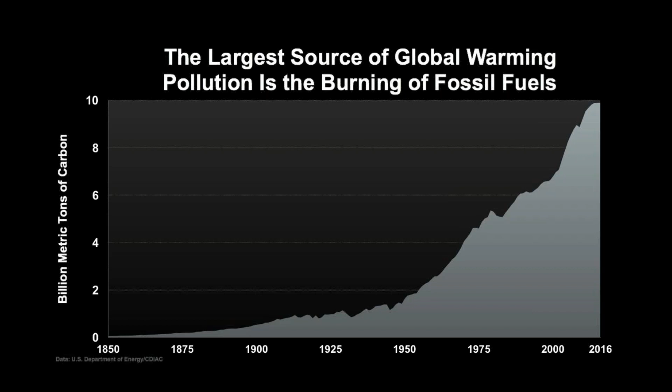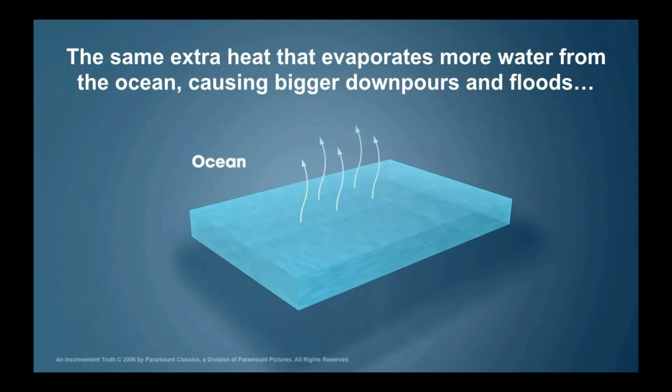The impacts are starting to be so visible. We're not talking theoretical anymore. We're talking flooding and natural disasters at a level like we have not seen. The explanations are pretty simple. The warming of the air evaporates more moisture from the ocean and contributes to stronger storms. And it also draws more moisture from soil and so contributes to drought.

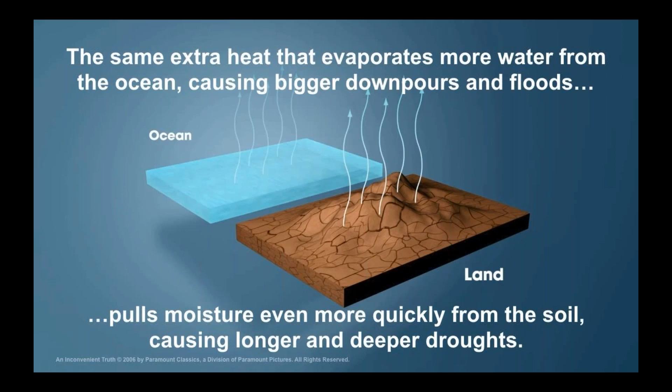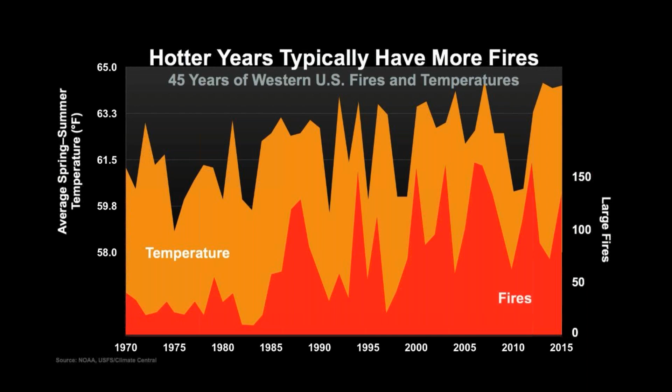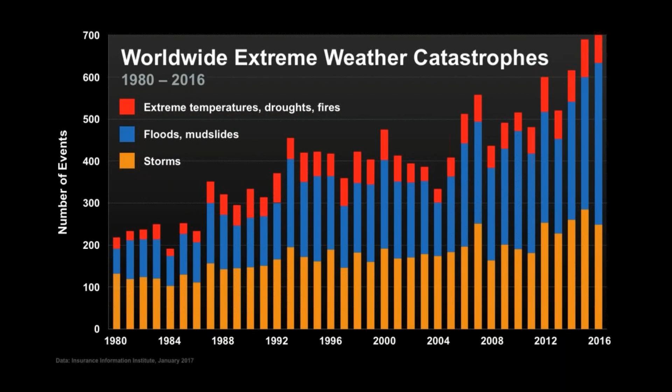We're starting to link these catastrophes to migration patterns, and then migration patterns that impact on our politics. You could almost make statements that what happened last November, I'm not going to get into politics, but a pretty dramatic election last November, and you can make the connection between that and immigration. They're not that far-fetched. And the potential for more of it. Imagine if New York City flooded. What would be the impact on upstate New York? Where are those people going to go? I'll tell you, they're probably not going to go south.

Tropical diseases on the move. This is migrations of tropical diseases, including to North America. I've got to ask about the migration of the Lyme tick in the last 10 years in upstate New York. We didn't have it, what, 15 years ago? And now it's a major issue. It certainly is an epidemic. And the risk of losing up to 50% of all land-based species.

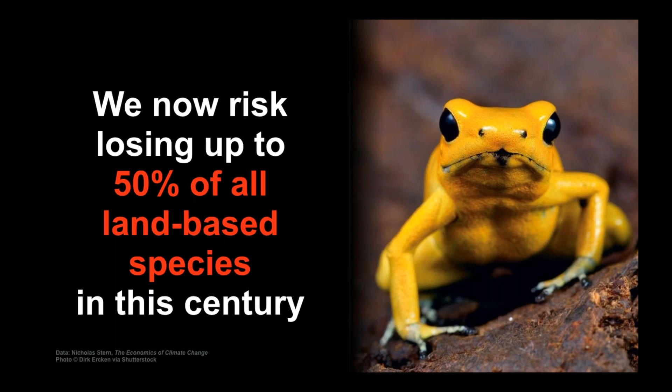So this is about one. I showed 10 slides. His slide show is 500 slides, and he moves through it in about an hour and a half. He's got a short version, and I excerpted the short version. Many of you have heard this stuff, but for me, it was an eye-opener to see it again. And this precious planet of ours really is at risk.

So my takeaways. My daughter Noah said, "Come with me." I said, "I'll go along." Well, I came away saying to myself, climate change, unlike 11 years ago, when I saw it through a lens of melting glaciers, today I see it differently. I see it much more broadly. An urgent crisis requiring immediate and broad action, including and especially by us. I think there is an important calling and a role for us in the building science, and opportunity.

And it's changing, and it's changing fast. I'm going to make a presentation today on what I think some of the building research needs are, research and design, whether it's academic, architects, engineering, or behavioral science. There is a calling for a broad spectrum of research, and it's different. It's changing fast. That's what I'm going to try and touch on today.

I'm going to challenge you a little. I'm going to make some fairly strong statements that I believe about what those changing needs are. It's intended to stimulate discussion, but I believe it. So, broadly, priorities: scale. We need to scale up, and we need to scale up fast.

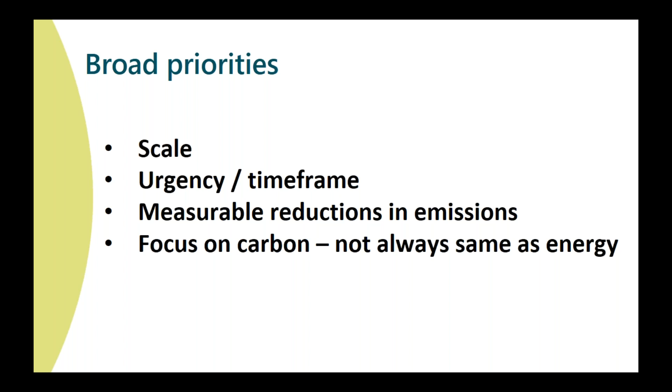With a focus on carbon. We think of carbon as kind of synonymous with energy, but it's not. There's some subtle difference. I'm seeing an emerging consensus that the electric grid will become more renewable. In upstate New York, we're lucky. We've got a lot of hydro from Niagara Falls and from the Saint Lawrence Seaway. We've got a growing amount of solar. We've got a little bit of wind starting to happen, and Cuomo's talking about a lot more wind offshore.

We're already at about 25%, and the governor's goal is 50% by 2030. That's 13 years away. And he's putting some oomph behind that goal. If you've read about what's happening in Europe, Portugal, Denmark, Scotland, the Netherlands, many of these countries have dramatically increased the number of wind turbines. You fly over those countries, you can see them, thousands of wind turbines. And so this is positive.

Ian, can we chime in? Is that okay? Sure. Yeah.

So on your last slide, you said that it should be carbon, not energy. Then you have that the grid will become renewable. I'm kind of of the mind that things that are renewable do not always provide the most carbon benefits. Any thoughts on that? You're looking at life cycle then? No, so if you have $1,000 to spend to save the world, where should you spend it first? I think that's a great question. It means optimization of the trade-offs between supply and demand. I would pose that as exactly the research that I think is needed.

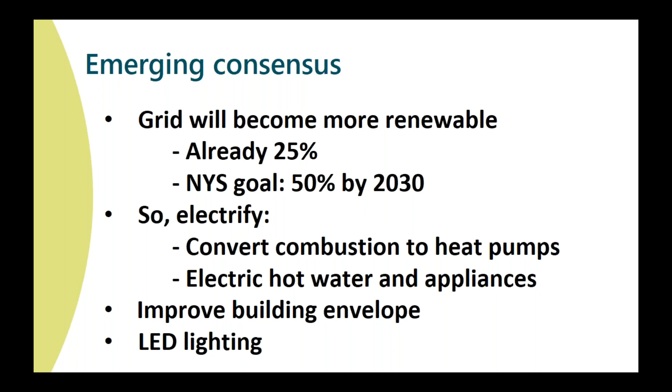Heat pumps are majorly here and here to stay. This is in Tompkins County, the growth in heat pumps, an informal survey we did of contractors. Mostly in new buildings. You've got a challenge in existing buildings, and that challenge is the low cost of natural gas. But in new buildings, we did a study for the county, and we're almost at a tipping point, where demand for heat pumps has grown so fast that their price has come down, and we're about to cross over the price of gas furnaces and boilers in homes. When that happens, there will be no reason to do combustion. And we're very close in Tompkins County.

So can you just say a word about Tompkins County? Is it reflective of the rest of the state? What's special about Tompkins County? First of all, we have the lowest unemployment in the state. We've got Cornell University, $3 billion in our economy. It's a relatively wealthy and progressive county, but we often look to it for trends.

So very often, NYSERDA takes little things that we've tried in Tompkins County and releases it to the state. So I would say that this is a community that understands climate change and is making decisions. And we have a very active, it's not only the environmental action, it's our county planning department that has just gotten NYSEG to stop a natural gas pipeline. And the PSC has ordered NYSEG to go ahead. NYSEG asked to do it. We're not going to put in a new gas pipeline, and we're going to do heat pumps for all of Northeast Tompkins County. So we're a few years, maybe 5 years ahead, but I'm seeing heat pumps going in Syracuse, Rotterdam. It's happening around the state.

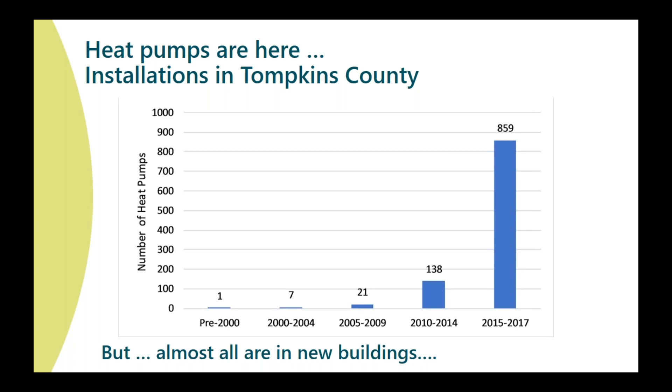We've got a challenge for retrofits. That's where we have a huge challenge, and it's the low price of natural gas that's killing us. So, over in Holland, I visited last summer, and I looked at the Energiesprong, which means Energy Leap program. And they are retrofitting over 100,000 apartments. I talked about scale. And this is what they're doing. They're recladding them, and they're filling the roof with solar, and then they're putting air to water heat pumps to replace boilers. But they're spending $90,000 per apartment. It just raises the question. I mean, we're getting into the same range as just taking the buildings down and putting up new buildings.

In New York State, when I run the numbers on replacing gas boilers and furnaces with heat pumps, I'm coming up with a payback over 50 years. You save a little bit of money, but not a lot. And so retrofits are a major challenge. So, the 50-year payback, that's without an envelope retrofit? Without an envelope, yeah. So it doesn't come down that much with an envelope. Even the envelope retrofits are struggling.

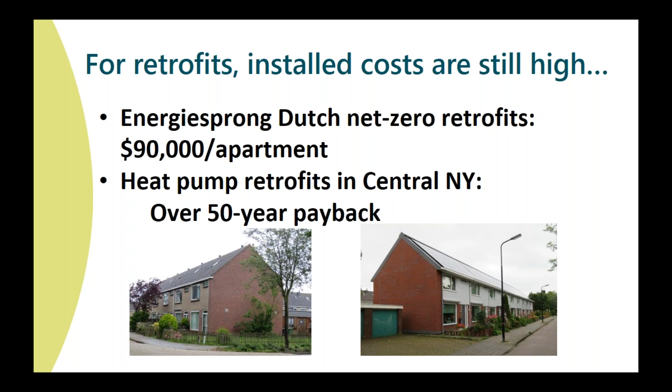And I want to present it just in terms of the research need. Given the consensus on electrification and high installation costs, finding ways to reduce install costs is a major priority. And this is a research need. We need to find ways to reduce install costs. We need to optimize the costs, heating versus envelope. What's the right balance of high efficiency heating versus envelope? We need to optimize renewables, or low carbon, whatever you want to call it. We need to optimize these things. And this is where there's a real role for academics who understand multiple variables and how to optimize it.

We need to reduce installation labor, and I think back to the time and motion studies we did 30 or 40 years ago in industry. We need to find ways, and it's very, very feasible. And on the basis of good research, we can develop best practice. We did some of this with deep energy retrofits, where we even looked at the type of tape that's used to tape exterior rigid insulation and how much faster it is to use a tape on an applicator rather than to peel off something. There's a lot to be gained just by looking at the industrial aspect of this work.

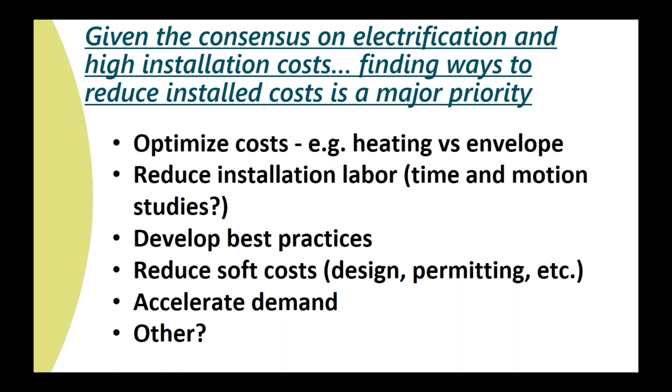So acceleration, work in the area of acceleration. COE and Taitem and some others work with an acceleration initiative that NYPA had done. Acceleration is a good concept and it's interesting. We need to do more of it.

Okay, now I'm going to switch to envelope. What is the right amount of glazing? We often see some tension between engineers and architects over glazing. Architects in general like glazing. It provides natural light, provides views, and it provides daylighting. And it's attractive from the exterior. There are many good reasons why we like glazing.

There are also energy penalties with glazing. Those of us who are engineers that have done energy modeling, it jumps out at us. It screams at us. And so it's the people at ASHRAE who have been pushing the limit on glazing as WWR, window to wall ratio. So our new energy code, October 2016, has a limit, 30%. You can't do more than 30% window to wall ratio on commercial buildings.

No limit yet for residential. And there are some exceptions. You can tiptoe around that rule if you use some exceptions. I did a survey of high performance buildings in the Ithaca area, net zero buildings, LEED platinum buildings, buildings that were really fabulous buildings. And every single one had a window to wall ratio of less than 20%.

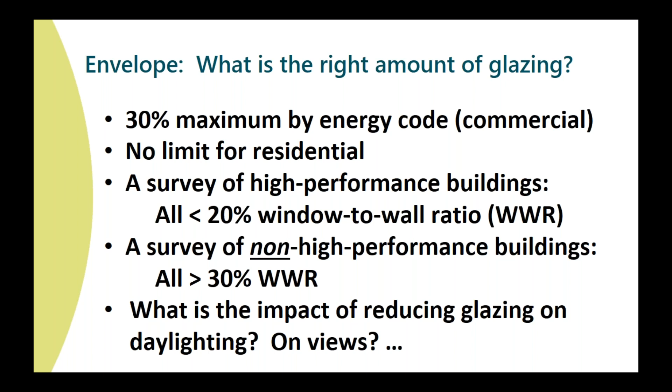I did a survey of non-high performance buildings in the Ithaca area, ones that just complied with the energy code. They're not LEED, they're nothing special. All of them have a window to wall ratio over 30%. Most of them were started and designed before the new energy code. So this issue of how much glazing is a major issue, and I want to deal with it step by step. I first want to talk about daylight.

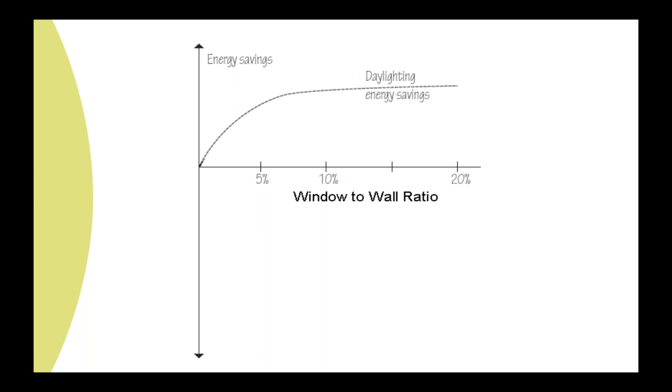So this is a graph that's excerpted from my first book. When we add glazing to a building, if a building doesn't have any windows, there's no savings from daylight, right? So as we start to add windows, we see good savings, good daylight. And as we add more and more windows, we reach a point at which there are no added savings. We've done as much daylighting as we can. So that's what happens with the energy savings with daylight.

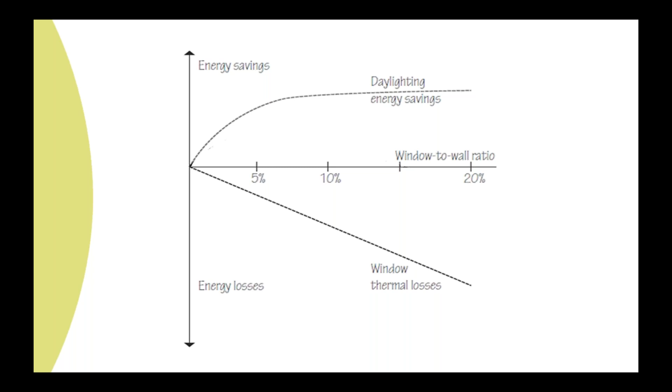Window thermal losses work against you, and they keep growing, and they grow, and they grow. The good thing is that with daylighting savings in office buildings, the savings are greater. The slope of this line is greater than the slope of this line, so you want to add those two, right? And if you add the two, you see there are net savings, but the net savings start to go away as you keep adding glazing. And there is an optimum.

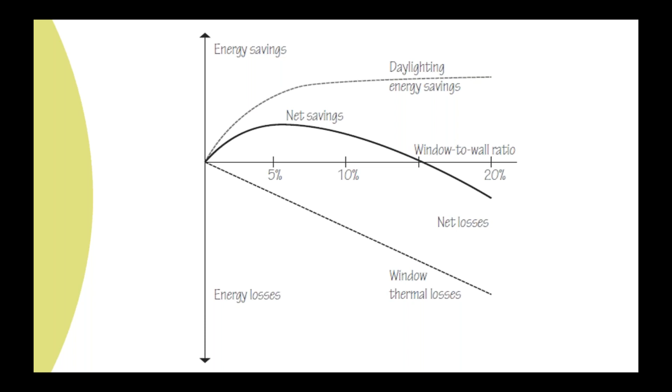I have done a lot of literature searches, and the best paper I can find on this is from 1981. Back then we were talking about incandescent lighting and a little bit of fluorescent light. And things have changed. How have they changed? Well, lighting has become more and more efficient. And as lighting becomes more efficient, this line starts to come down, and your savings start to come down. And I don't know what that optimum is. I have a guess it's below 10% window to wall.

It's small. For some buildings, like homes, residential buildings, where lighting on average is only on for 2 or 3 hours a day, this never goes positive. There is no benefit to daylight. Yes? There's no energy benefit. No energy benefit to daylight. So you're going to talk about views? I'm going to talk about views next. Okay. I'm trying to be methodical, but I'm also wanting to be honest.

The energy savings from daylighting is going down fast as LED lighting and the controls that come with LED lighting reduce the electricity usage of artificial lighting. We're moving towards no benefit to daylight. And if there is, it's small and it requires a very small amount of light. Much less than we currently do.

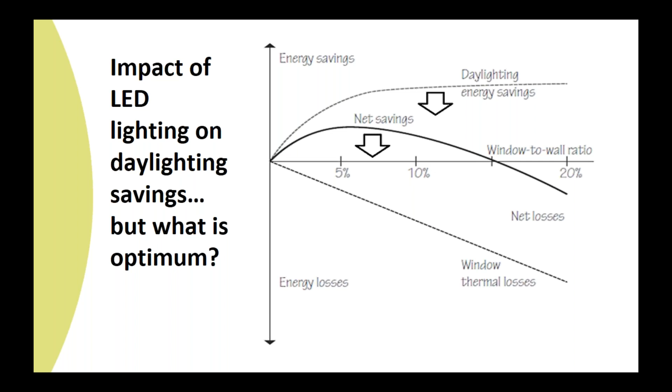Okay, now let's talk about view. If small glazing is required for daylight, what's needed for view? The WELL standard is some kind of a wellness health standard. It's not one I'm familiar with, but I did look at its requirement. It has a 20% minimum window to wall ratio in regularly occupied spaces required for acceptable view. Minimum of 20%.

BREEAM is the same. LEED, I don't think has a requirement. Well, it's not required. You can get a point for views, but there's no minimum window to wall. Do we really know? I have to say, I think that this 20%, I'm guessing somebody pulled it from a hat. So I would really like to encourage us to be asking questions.

In your beautiful Brooklyn brownstone row houses, I guarantee you window to wall ratio is like well below 10%. You've got a facade, and then all of those interior spaces are party wall. And I think we have too much light at 30%, and certainly if we use the little exceptions we can, and in residential buildings, 30, 40, 50%. It's way too much for daylighting, and I would argue it's way too much for view.

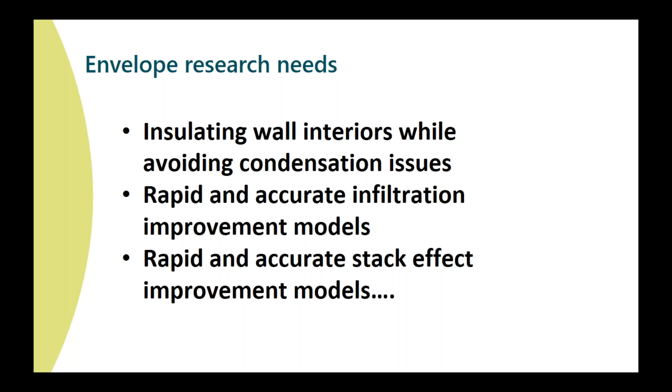And we need models. You know, a lot of people in academia are good with models. They're much better than us who are in the building design field. We need those people who are good at models. Rapid and accurate stack effect improvement models. We're only beginning to understand stack effect.

I did a project, this is my house, in Home Energy 2 or 3 months ago, where we looked at stack effect. And stack effect is much more than hot air rising. The big finding was that stack effect is as much cold air falling. If you stand in an open stairwell and put a wet hand near the ceiling, you will feel the warm air rising. And if you put your wet hand near the floor, you will feel the cold air falling. And I believe this starts to explain why upper stories of buildings are way overheated.

It's not just warm air rising, it's cold air falling. My takeaway from this project is we need to understand more. We just don't understand enough about this.

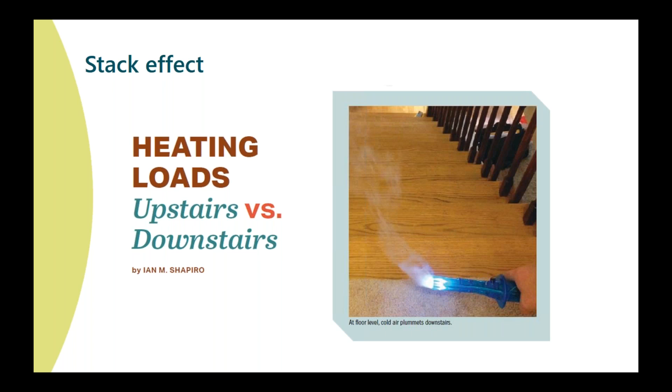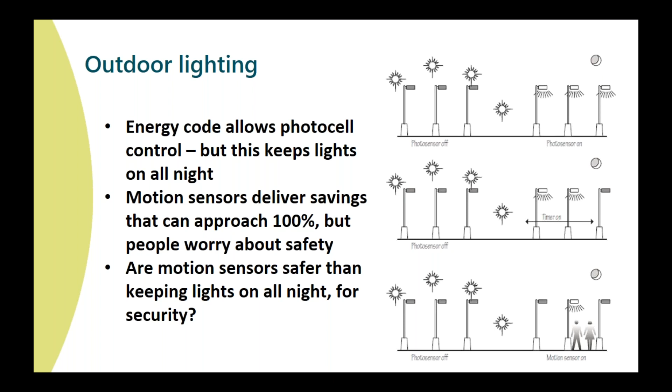If it is safe, I can tell you right now, we'll save 90 to 99% of our outside lighting. We will put it all on motion. But there's a need for interdisciplinary research, and we have to move beyond just speculating.

Plug loads. Growth. Plug loads are growing, and I see it in our energy projects. We measure the results of energy savings on many projects. We do this for NYSERDA. And we have seen us repeatedly meeting our goals for combustion gas savings, or for fossil fuel savings, and we often don't meet our goals on electric. And one of the speculations is that we're saving energy with our lighting improvement, and we're losing it because plug loads keep growing.

Plug loads are largely not addressed by the building energy codes. The new energy code has a little bit about so many percentages of the plugs needing to be controllable or something. But we need to know more. What works in the area of plug loads, a great area of research, and the behavior. How can we tell people to turn things off? And is there anything more we can put in the energy code? Because in our building designs, there's limited things that we currently do.

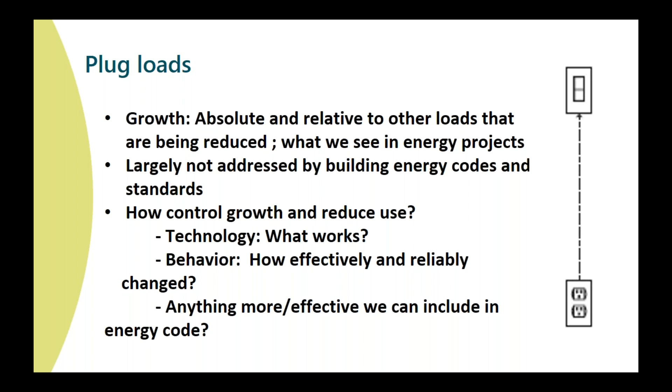Electrification: I think over time, space heating is going to go to heat pumps. We're left with industrial processes, ovens, drying, many of which are fossil fuel driven, and we need efficient electric substitutes for those. Heat pumps I've already mentioned for space heating, hot water I'll talk about in a minute, and then smaller loads. And as we electrify, as we remove fossil fuel loads and build up our electric loads, the grid is going to need to accommodate those changes.

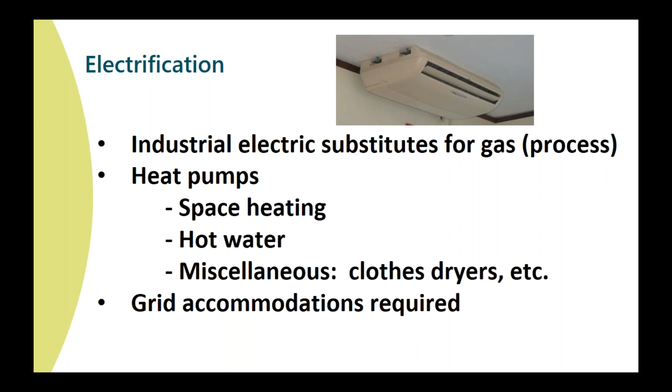Domestic hot water: I mentioned that the hot water loads are growing. I've been doing this work for 30 years, and if you ask me today what I should put in my net zero house, I honestly cannot tell you what the best water heater is. I just don't know. Hugh has done some fabulous research in this area. We've got heat pumps. I threw a heat pump in my basement. I'm very happy with it. But my basement has a boiler, so it's kind of using some of the heat from the boiler.

There's a move towards not using basements in high performance buildings, and then a packaged heat pump like this one doesn't make as much sense. You can't put it in a closet. So then maybe it should be a split system. Well, the best, lowest cost split system heat pump these days is like $3,000 or $5,000. We've got challenges here with heat pump water heaters. Maybe we just go back to electric resistance water heaters.

I have questions about central versus point of use, and I'll be honest, when people come to me, I tell them I prefer electric. We've got a basement heat pump. I'm still struggling with this, even after I've read it. Yeah, so a heat pump water heater makes sense in a bad basement, but if you have a good basement, it no longer makes sense. How can we reduce losses? How can we reduce flows, point of use?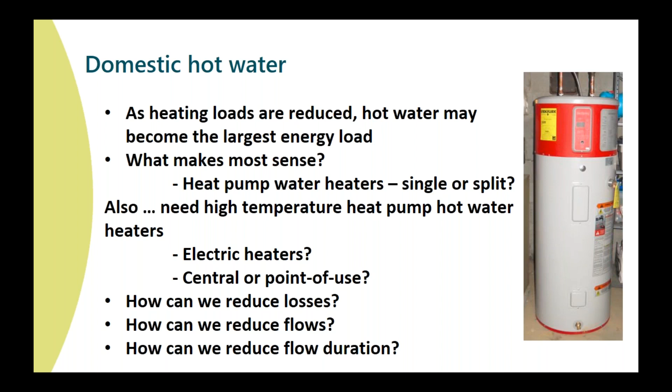Heat pump efficiency. I spent the last 6 months on this. I wrote a report for Tompkins County that said that in certain situations, ductless heat pumps use the same amount of energy as ground source. Well, New York Geo came after me with tar and feathers. I wrote a report based on my model that said that ductless heat pumps, in a situation where you don't have distribution losses and you've got better temperature control, are as good as ground source heat pumps that are ducted, have duct losses, and don't have as good temperature control. They usually have just one thermostat.

Well, they came after me and they said no, air source heat pumps stink. So I spent literally several months. We did a literature survey.

Hugh Henderson pops up. Hugh pops up over and over. So Hugh did a study. Like whack-a-mole. He keeps popping up. You know, he did a study of 2 or 3 high-performance buildings in this area, and found that indeed their air source efficiency is very low.

I came up with this list, I don't know, eight of them, all of which I felt are fairly good. It's hard to measure the efficiency of a heat pump. It's really hard, especially if it's variable speed. And so they're probably different climates, right? Because Ecotope is Washington, probably. This was Northwest, yeah. But most of them were Northeast. Bohac, I think, is Midwest, upper Midwest.

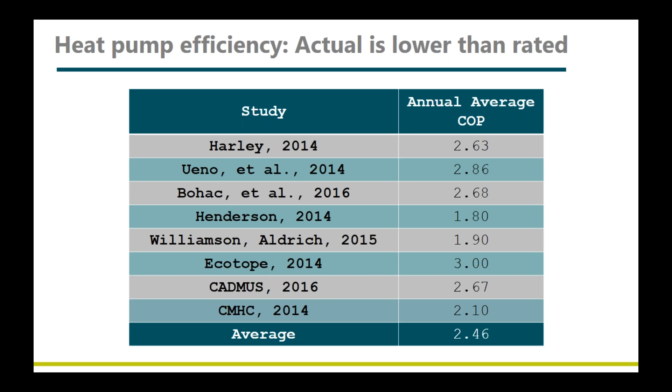So we're not there. And just for perspective, I just got done looking at 50 water or geothermal systems, and 3.6 was the average. So I changed my report. And I said that as of today, ground source heat pumps are still more efficient than air source heat pumps. And this is where I'm at today. So we need best practices to get to the rated efficiency. We need higher efficiency in general. We need more efficient product. We need to do some work on setback.

There is almost universal consensus in this country that you cannot lower the temperature of heat pumps because recovering from setback, they operate inefficiently, and the current view is that we cannot set back the heat. If we could, the savings would be huge because heat pumps are thermodynamic devices, and at a lower indoor temperature, they operate much more efficiently. So we really need to try and address this in research. What is the issue? Why are they struggling? If we can solve this problem, we're going to boost their efficiency by 20%.

We need to reduce the install cost. This is already coming down in new construction. We need to reduce the install costs for retrofits. And we need more data on the larger VRF heat pumps versus the smaller ones. I've got some preliminary data that I shared with Steven Winter Associates. They presented down in New York City a few weeks ago. Our preliminary findings, we're talking 2 or 3 buildings, say that smaller air source heat pumps use less energy than larger VRF systems. I don't know why. We don't have a lot of data on these larger VRF systems.

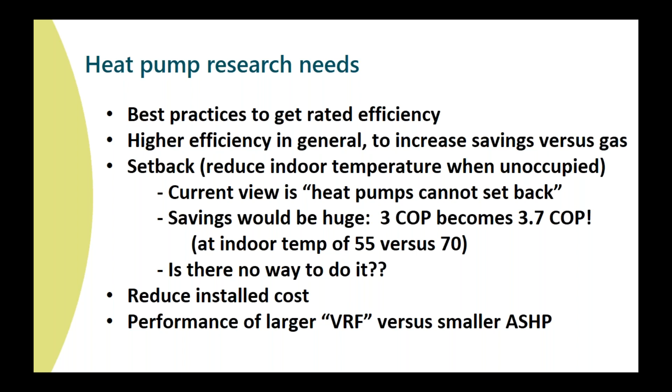Now we're talking about the grid. I often get asked, if we start converting all this combustion stuff to heat pumps, are we not going to blow up the grid? Currently, we are a summer peaking state. New York State, this is the New York ISO. We peak at about 4 p.m. on a summer day. And look at this, the winter. Where are we going to put the heat pump load? Well, it's going to show up in the middle of the night, in fact, early morning in the winter, because that's when our heating loads are great. So if we throw in a bunch of heat pumps, they're going to add load right here. It's just filling in the trough.

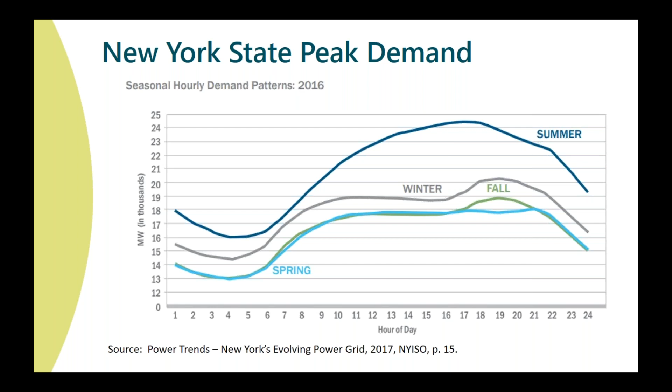In the short term, there's no problem converting fossil fuels to heat pumps. Now, if we go ahead and convert our whole building stock, I was in New York City last week. They are talking about trying to convert New York City from fossil fuels to heat pumps. I mean, that's how bold their vision is. And if we convert all of our buildings from fossil fuels to heat pumps, we're going to become winter peaking. So there's not a short-term problem. In fact, short-term it's good. We're going to fill in this trough, and our efficient heat pump cooling is going to reduce this one. It's great. Long-term, we've got to shift from summer to winter, and then we need more wind and hydro, which will do that nighttime winter stuff, because the solar is great for the summer daytime.

Policy. I want us to not limit ourselves to technology. We have to step out of our comfort zone, even the engineers among us, and we need to get involved in policy discussion. I'm writing a green building policy for the city of Ithaca right now. We're going to present about it at the Green Building Conference. Something that might tiptoe us as a requirement toward net zero.

So how do we continue improving the energy code? What is the limit? How far can we go? Are we talking net zero? How do we handle renewables? All of these are questions I'm struggling with for the city of Ithaca. The state of California is talking about requiring residential buildings net zero by 2020. That's 3 years from now. And commercial buildings by 2030. But we're not that sure how we're going to do it.

I just took a look at the proposals for the 2018 energy code, and with all of the tremendous need that we have to reduce energy use, it's not much better than 2015. So there's an issue of hitting the wall. How do we avoid hitting the wall? At a certain point, there are people pushing back saying, we're not going to do that. And so how do we reduce energy use while keeping building construction affordable? There are actually ways in which you can reduce carbon emissions affordably.

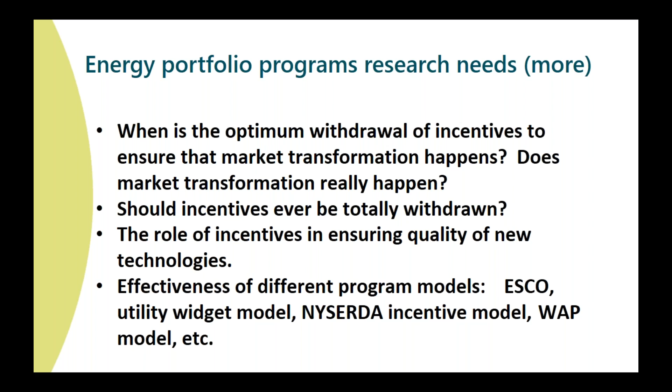Effectiveness of different program models. We've got all kinds of different models, again, different portfolio programs. We need to know really what works and what doesn't work, and I don't think we have a good handle on that yet.

Even more, what motivates owners? How can owners be motivated if savings are low or non-existent? With the low price of natural gas, you know, nothing's going to happen. So how do we move the needle? We have to do it.

If this was, you know, asbestos causing cancer in every single one of these buildings, we would do it, even though there's no payback. We need it, and it's almost like a curse if there's any payback at all, because we need to do this work, even though there are not savings, and we need to abandon a model that says we will only do work if there's savings or if there's a payback. Unfortunately, the demand for natural gas is only going to go down, and that means that the price is going to keep going down.

Is there a broken window theory of energy improvement? Anyone heard of the broken window theory? You know, in poor neighborhoods, if there's broken windows, then people are less likely to maintain them. Should we be taking care of minor things like lights left on during the day, in the hope that it motivates people to do deeper work?

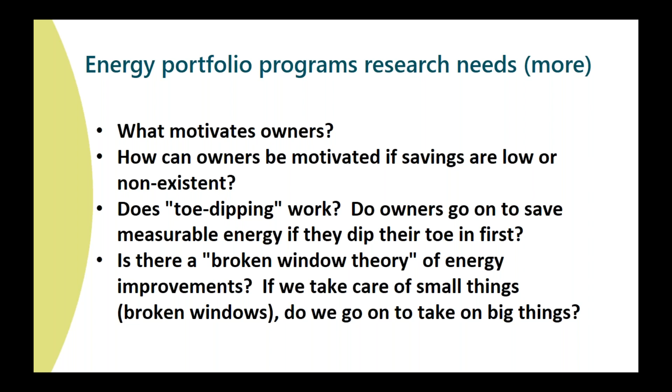There's so much research that needs to be done, and a lot of it's technical, and a lot of it is in the social sciences. But we're the ones who know about it. So we need to tell the social scientists what our needs are.

Areas of lower priority. Here I'm going to challenge you all a little bit. I think that demonstrations are and should be a lower priority. In my company, I have done 20, 30, 40 demonstrations in my career, more. I mean, it's been a major area of work, and I think it's often good, but a typical demonstration takes 4 to 8 years.

You know, I don't think I'm being slow. It takes time to develop a concept. It takes time to find sites. It takes time to sign contracts. As often as not, sites that we have found have fallen through, and we had to find other sites. It takes another year. It takes time to design. It takes time to install, and then it takes 1 to 2 years to evaluate. I have rarely done a demonstration project that has not taken 4 years, and often taken 6 to 8. Okay? I'm just not sure we've got the time to be doing it.

We need to be moving to scale. We know what works. Heat pumps work, envelope improvements work, LED lighting works. We know what it takes to take the building to net zero. We need to make it more affordable, and we need to scale up fast. So I'm working with many of you on demonstrations. I'm going to continue doing demonstrations. But I also, I'll be honest, I think that we need to be moving a little faster.

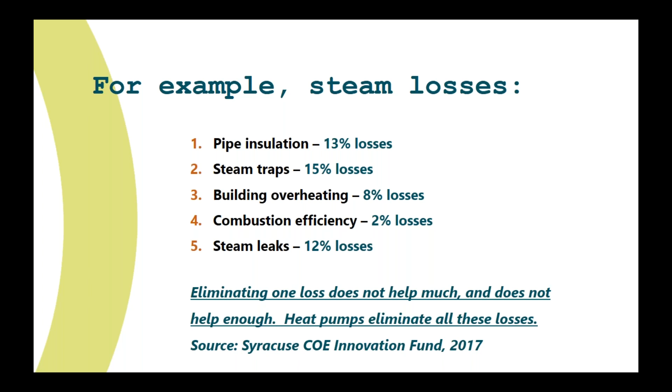I've been advocating just putting in heat pumps. We will immediately eliminate all of these losses and gain some other efficiency. So I'm looking for bolder, more comprehensive, more holistic improvement rather than working in the margin.

In closing, the stakes are high. Opportunities are many. There's plenty of work out there for all of us. But scale is really important. Moving to scale, and we need to invest in our best and brightest. My daughter is one of our best and brightest. Thank you.

Thanks so much, Ian. Turn up the lights and let's take questions. So Ken. Hi. With regard to solar PV, what's your take on the status of battery research and storage? I think it's happening. It's not something I'm very familiar with. I'm hopefully about to do a project in that area for a heat pump manufacturer wanting to look at batteries.

I would never have thought batteries would be an answer to anything. And then the Toyota Prius came along, and I was blown away. I've had a Prius 8 years, and I haven't had to change the battery. You know, I think battery technology is changing fast. And there's a second emerging demand for them, not only the grid, and that is resilience.

I mean, people are starting to say that these big storms are going to come through. I've got a screen capture of Hurricane Sandy and its projected path, where the eye was projected to go through my mother's house. And that was before it landed in New Jersey. So it missed us. But there's a chance. We see these microburst storms all summer long. You know, I'm starting to worry about resilience in my house. I never thought I would have to worry about it.